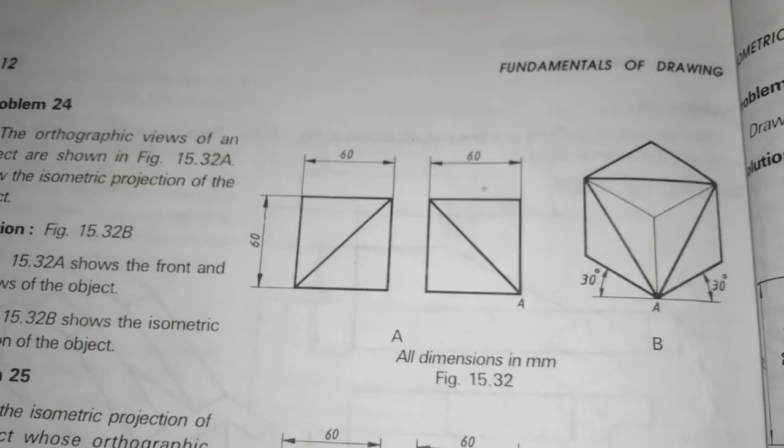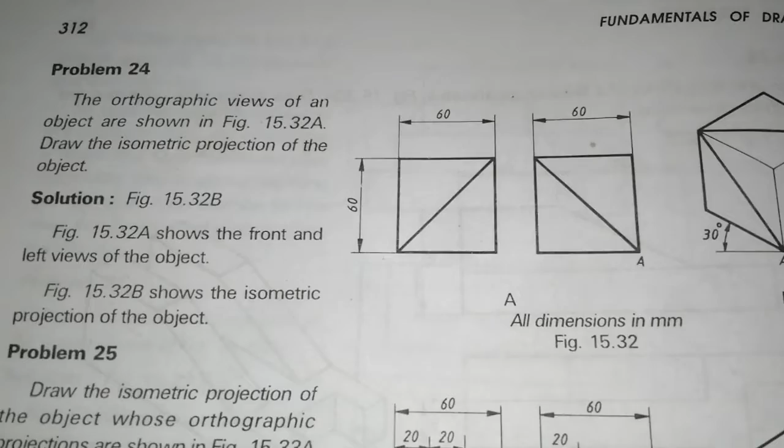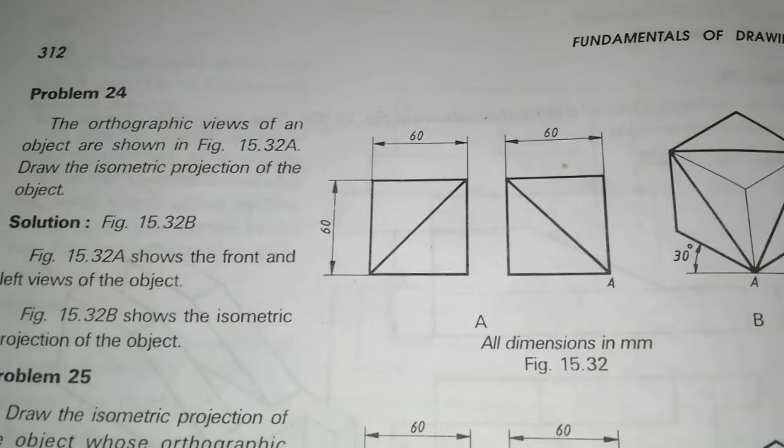This is a drawing about a miscellaneous problem, orthographic projection into isometric projection, how to take length, width and breadth as shown in the figure. I'll teach you and tell you how to take length, width, breadth and height also.

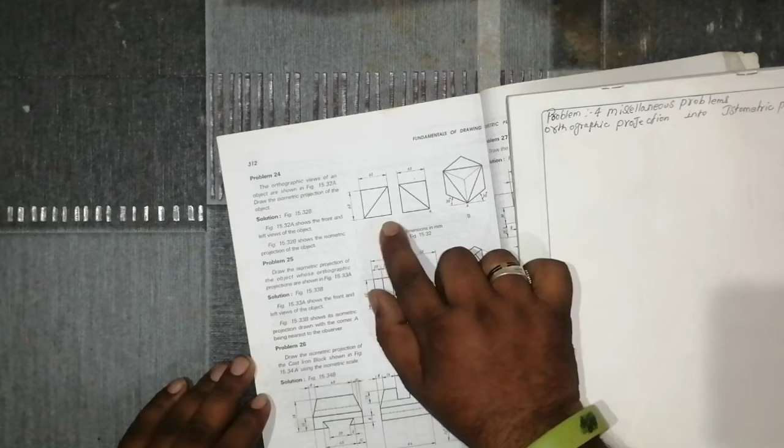First observe the drawing, what they have given. The length, width and height all around is 60. Then let's see how to make an orthographic projection into an isometric view. Just observe the drawing, what the drawing has been given. Take it here, they have given it like this.

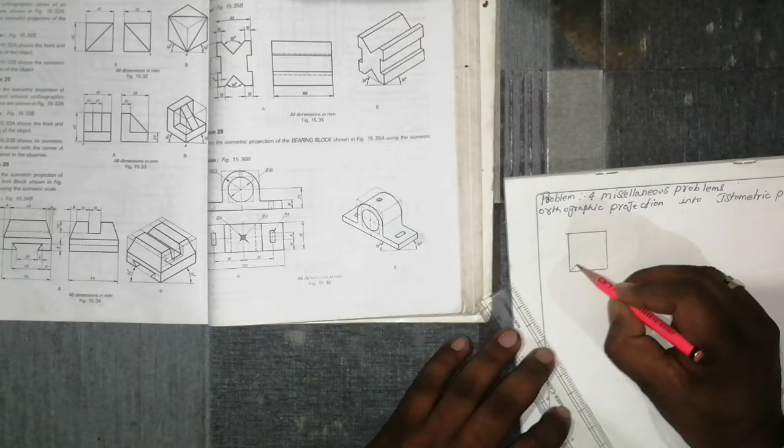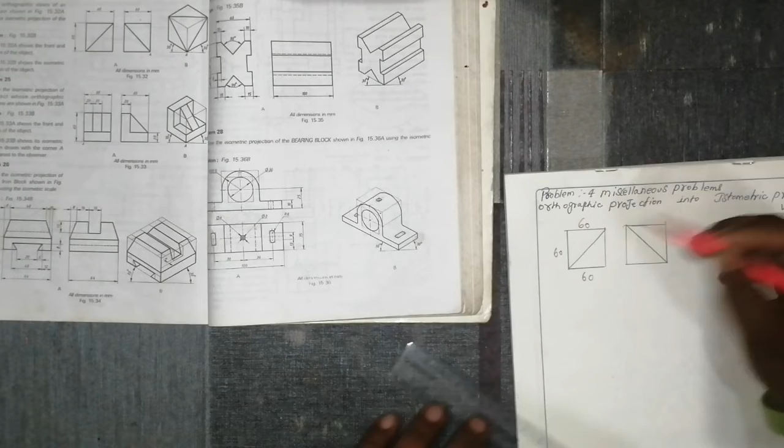So the length will be 60, the width will be 60, the height will be 60. Again in the side view they have given it like this.

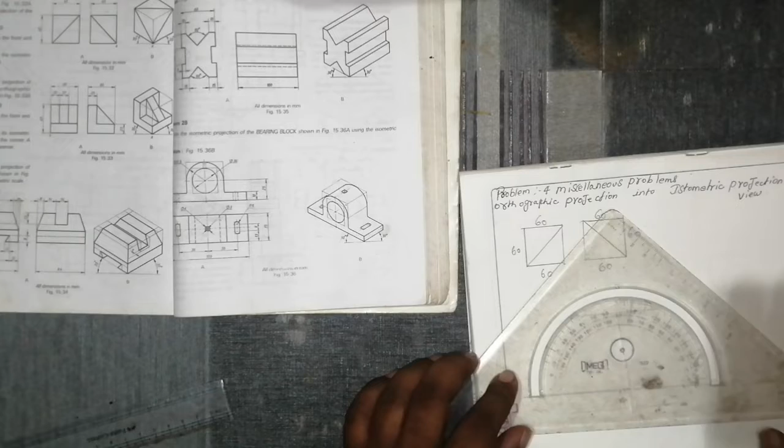So this also 60, this also 60 and this also 60. Then how to draw: keep a middle point, and using a protractor, take 30 degrees.

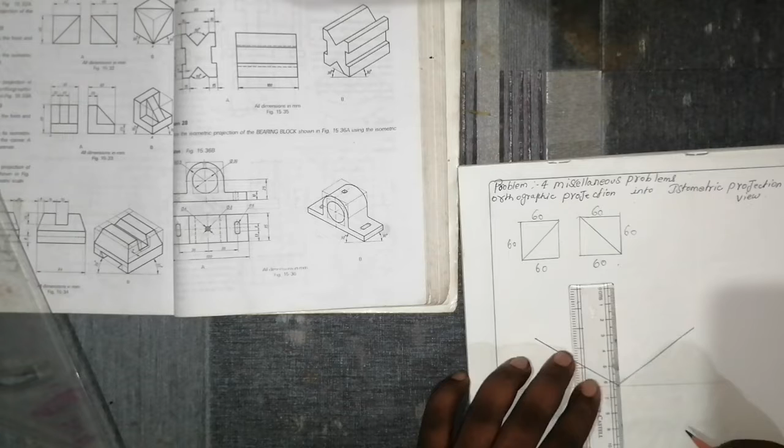After that take the measurement. This will be 60 mm and this will be 60 mm. So the height will be 60, and here will be 60, and here also 60.

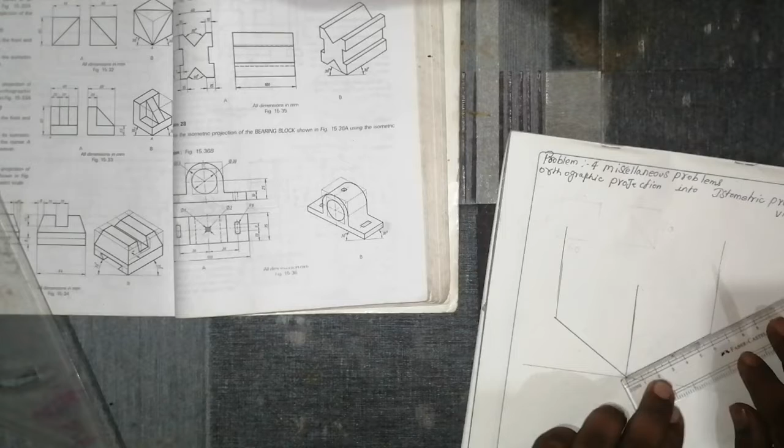Whenever you are drawing, it should be a square like this, then the drawing will come out very neatly. So this is also 60, this will be 60 and this will be 60. Make a square box like this.

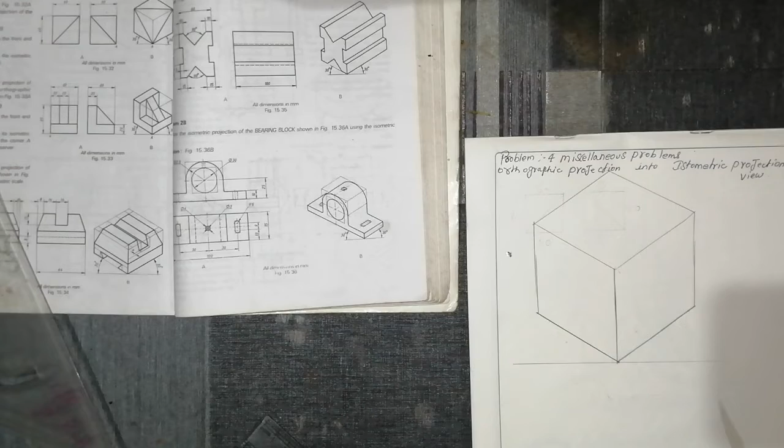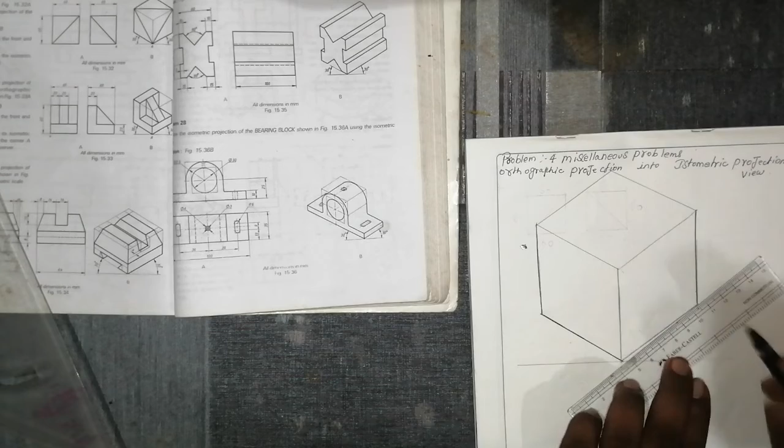What the drawing has been given, make it dark. They have been cut in the middle portion, this triangle portion and this triangle portion, so it will come like this.

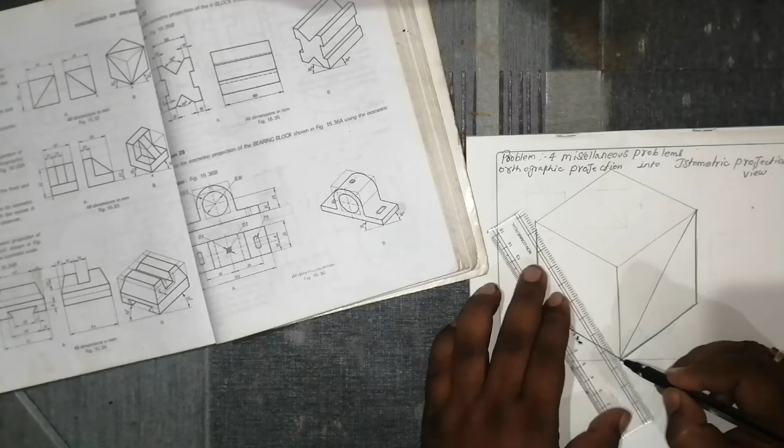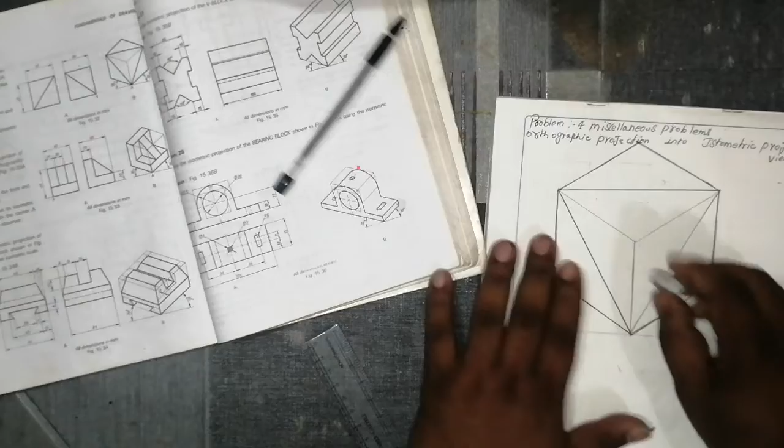So the drawing will come like this. Just rub it on. So this is the drawing, what they have given in the front view and the top view.

So the isometric projection drawing will be like this. It will be cut like this, and here it will be cut like this.

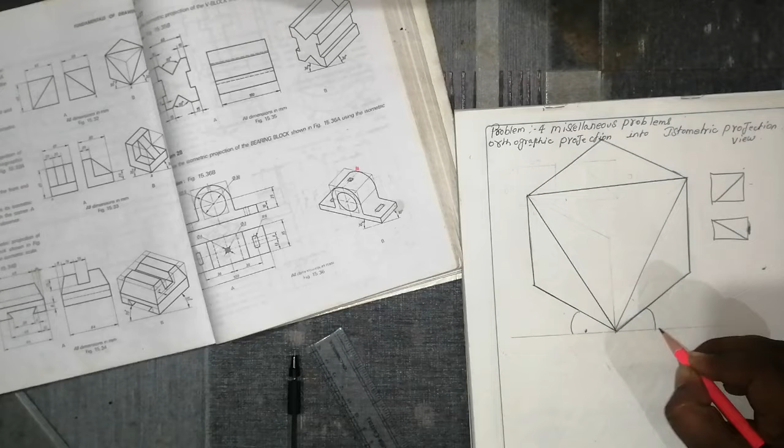This will be 30 degrees and this will be 30 degrees.